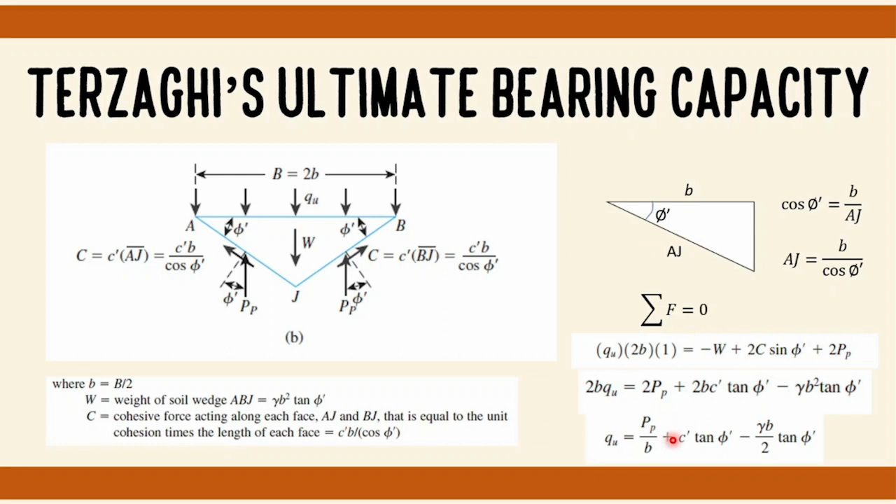Terzaghi stated that the passive pressure is the sum of the contribution of the weight of the soil gamma, cohesion C prime, and surcharge Q, and can be expressed as Pp equals one-half gamma times B tangent phi prime squared times Ky, plus C prime times B tangent phi prime times Kc, plus Q times B tangent phi prime times Kq, where Kc, Ky, and Kq are earth pressure coefficients that are functions of the soil friction angle phi prime.

Substituting the values of Pp into the previous equation, we get the formula: Qu equals C prime Nc plus Q Nq plus one-half gamma B Ny, where Nc equals tangent phi prime times Kc plus 1, Nq equals Kq tangent phi prime, and Ny equals one-half tangent phi prime times Ky tangent phi prime minus 1.

This formula, qu is equal to c prime Nc plus qNq plus 1/2 gamma B Ny, is used for the strip footing equation. This is Terzaghi's equation.

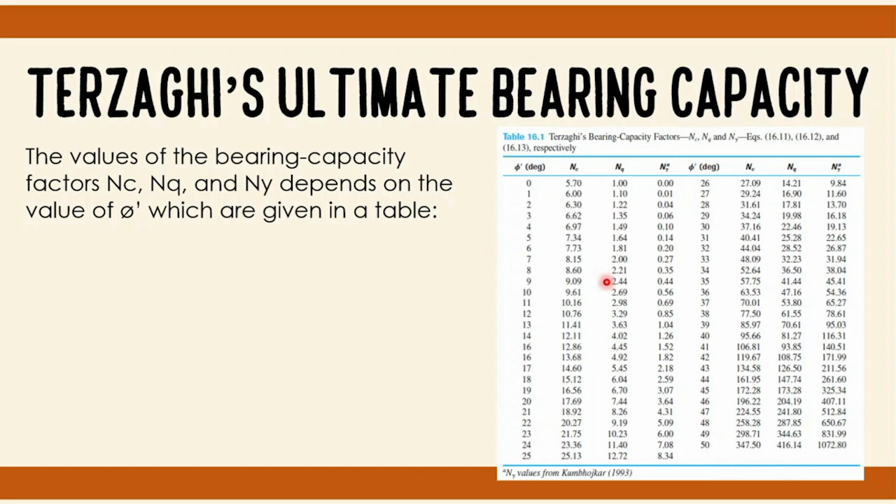For every value of phi prime, there is a corresponding value of Nc, Nq, and Ny. For example, if phi prime is equal to 5, then Nc is 7.34, Nq is 1.64, and Ny is 0.14. However, if this is not given in a table, there are corresponding formulas for Nq, Nc, and Ny.

For Nq, we use the formula by Reissner in 1924: tangent squared of 45 plus phi over 2, times e. This e is not the void ratio, it is exponential on the calculator, e raised to the power of pi tangent phi.

Our Nc is equal to Nq minus 1 times cotangent phi, and our Ny is equal to 2 times Nq plus 1 tangent phi. Nc comes from the formula by Prandtl in 1921, and Ny comes from Vesic in 1973.

Terzaghi suggested equations for square and circular footing. For square footing, Qu is equal to 1.3 C prime Nc plus Q Nq plus 0.4 gamma B Ny. For circular footing, it is almost the same, differing only in the last part, where it becomes 0.3 instead of 0.4.

Terzaghi did not provide an equation for rectangular footing. However, it is given in other books, so I included it here. The rectangular footing formula is Qu equals C prime Nc times 1 plus 0.3 B over L, where L is larger than B, meaning B is the smaller value compared to L, plus Q Nq plus 0.5 gamma B Ny times 1 minus 0.2 B over L.

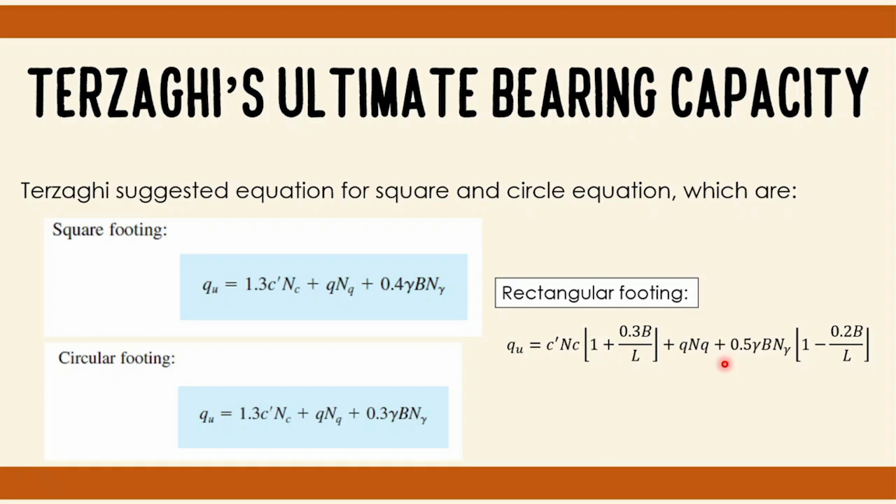Next, let's discuss the difference between the modes of shear failure. We already know how to derive Terzaghi's ultimate bearing capacity equation. Now let's differentiate the modes of shear failure. There are three types of modes of shear failure: general, local, and punching shear.

In local shear failure, as load increases, settlement also increases at almost the same rate. When it reaches the peak load, it settles continuously. However, in punching shear failure, the settlement is almost continuous as load increases.

Good day, everyone. I am King Haroun M. Sultan. In addition to what Mr. Saladaga have discussed, let us talk about what is a foundation. Simply put, a foundation is a part of a structure. It transmits load from the structure itself to a substructure, which in this case is the soil.

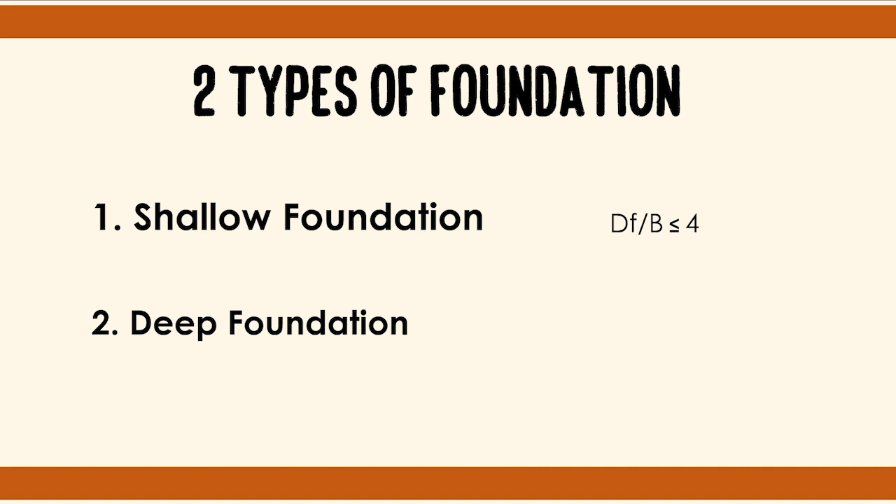There are two types of foundation: shallow foundation and deep foundation. In the shallow foundation, the ratio between the depth of the foundation and the base is less than or equal to 4. In deep foundation, on the other hand, the ratio between the depth of the foundation and the base is greater than 4. So it is a job of an engineer to design a foundation to ensure that the foundation will not undergo shear failure or excessive settlement.

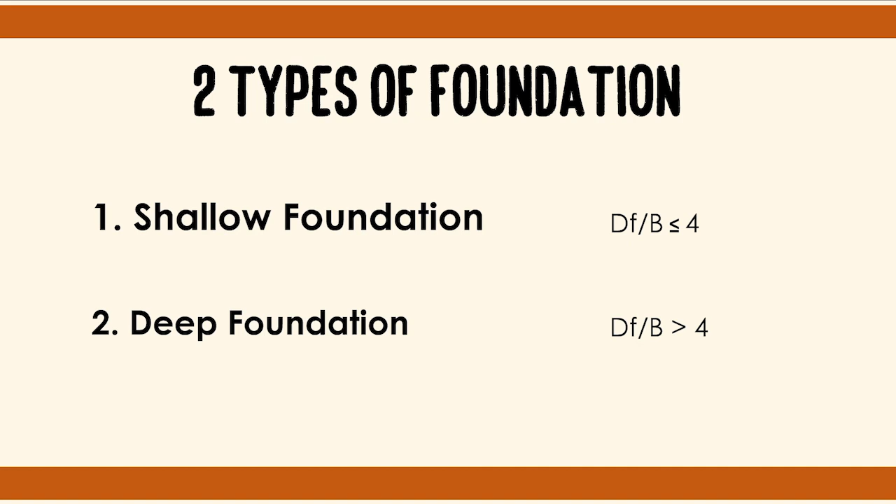Terzaghi's ultimate bearing capacity theory belongs to the shallow foundation. Terzaghi has three equations depending on the shape of the foundation, which was discussed earlier by Mr. Saladaga. So now, let us have an example.

Good day, everyone. I am Katina Petrache. So, my groupmate already discussed the concept of Terzaghi's ultimate bearing capacity theory. So now, I will give an example.

Problem number 1: a square footing for a commercial building has a dimension of 2 meters by 2 meters, founded 1.5 meters below the ground surface. Unit weight of the soil is 18 kilonewton per meter cube with a cohesion of 10 kilopascal. Under the condition of general shear failure: A. Compute the angle of internal friction given the bearing capacity factor NQ is equal to 3.94, and B. Compute the ultimate bearing capacity in kilopascal.

Use Terzaghi equation. Now we have the given: df, or the depth, is equal to 1.5 meters, B of 2 meters, unit weight 18 kilonewton per meter cube, and C, or the cohesion, is equal to 10 kilopascal. So the first question is, we need to find the angle of internal friction with the given bearing capacity factor NQ is equal to 3.94. So in this case, we need to use the Reissner formula.

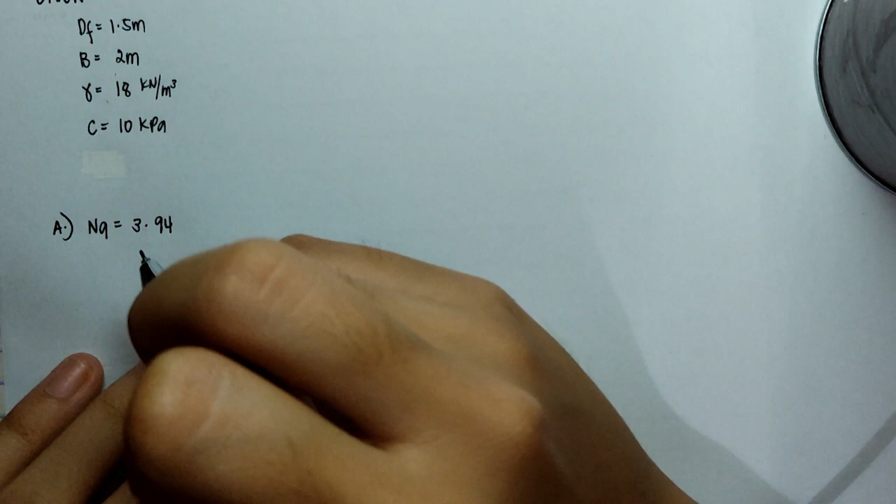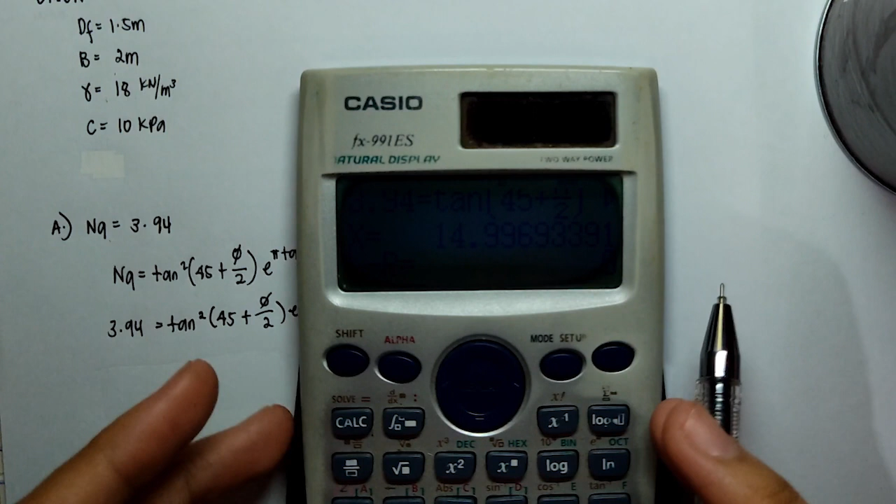We just substitute the NQ, which is 3.94, and then the unknown will be the angle of friction. So this will be the equation in order to find the angle of friction. So in computing 3.94, now we have 14.9966, or 15 degrees. So now we have the angle of internal friction of 15 degrees.

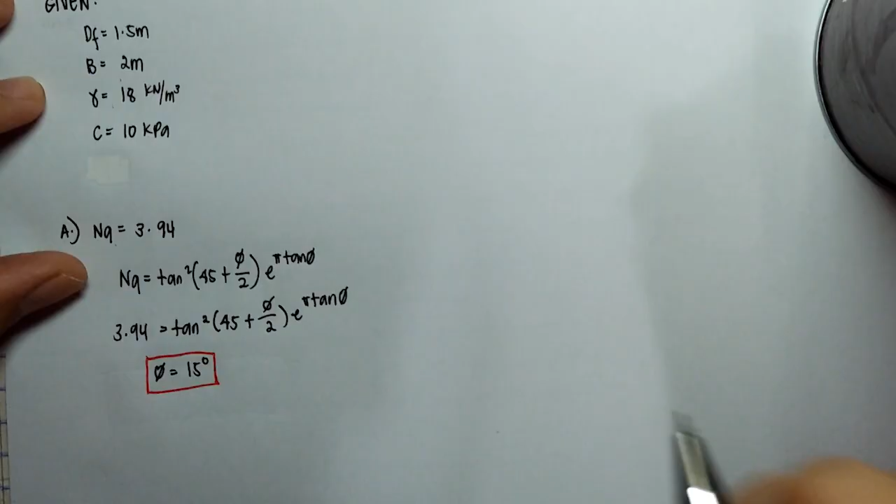Next, we need to find the ultimate bearing capacity in kilopascal. Since this footing is a square footing, we need to use the square footing formula in general shear failure. So we have this formula.

We all know that we have the value for C, which is 10, the NQ, which is 3.94, the unit weight, which is 18, and the B, or the base of the footing, is 2 meters. Now the missing values, in order to get the ultimate bearing capacity, are NC, Q, and NY.

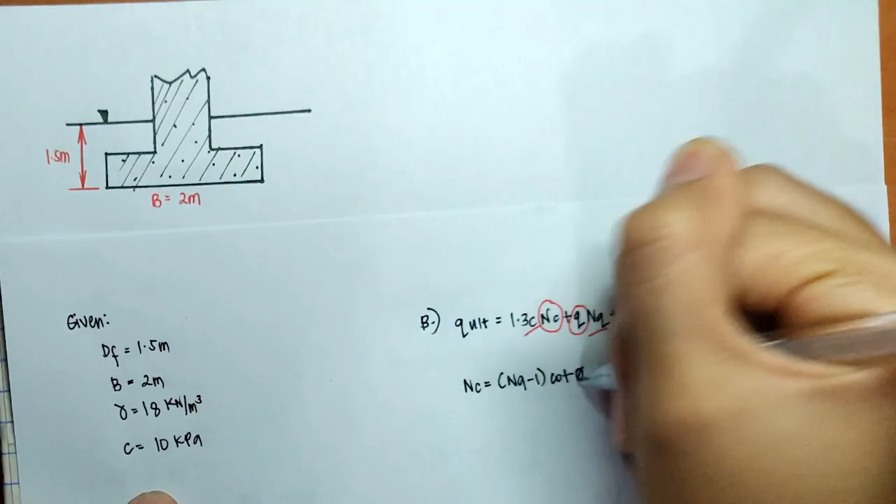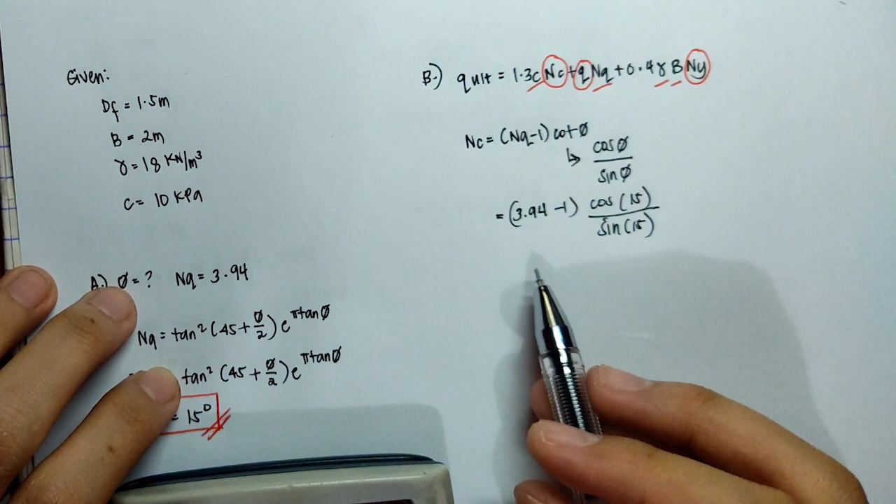So in calculating, we now have NC is equal to 10.972. Now we have the value of NC.

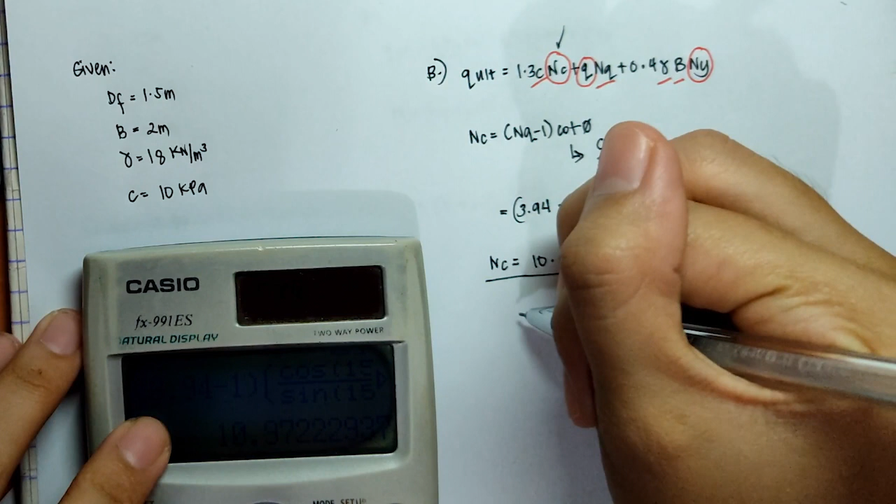Next, we need to get the Q. So we all know from the previous discussion about the concept that Q is equal to gamma, or the unit weight, times the df, or the depth. So we have values for this gamma and df, so we just substitute directly. We have 18 times 1.5. Q is equal to 27.

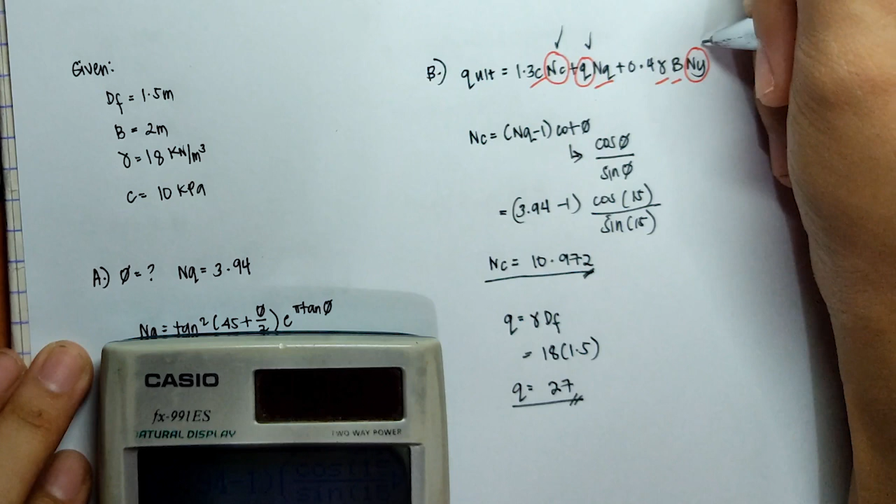Now we have Q. The last one, we need to compute the NY. So for NY, we will use the basic formula, which is this one. So we have the value for NQ and the angle of internal friction, so we substitute.

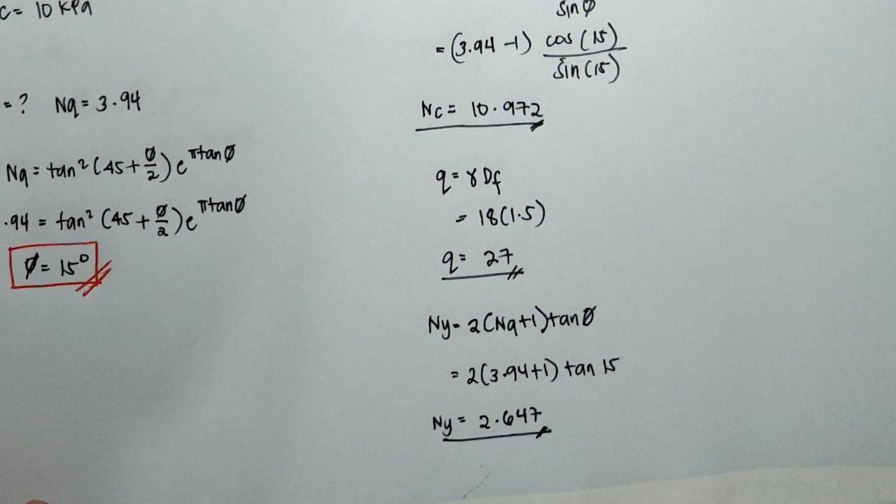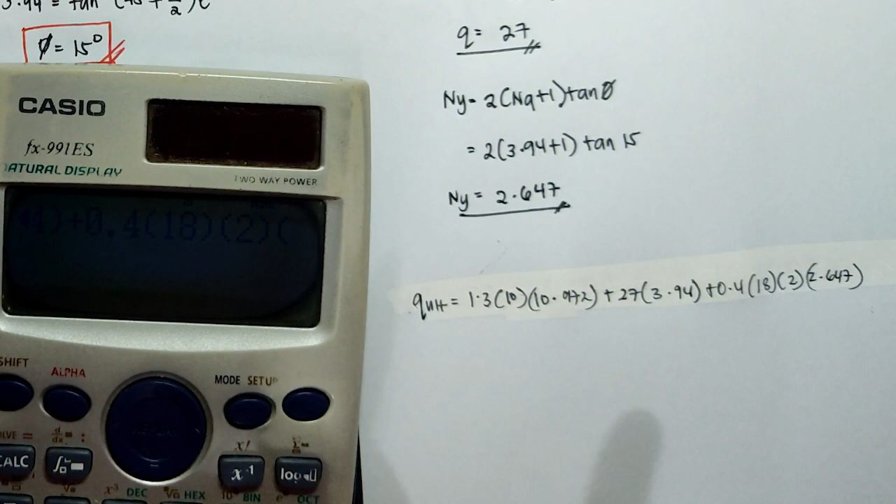Now we have the value for N gamma, which is 2.647. Now we can substitute the ultimate bearing capacity by substituting all the values in this equation. So to calculate, we have the ultimate bearing capacity of 287.133 kilopascal. So this will be the final answer.

Solution for sample problem number 2. First step, what we want to do is draw the figure for the foundation, and take note of the given unit weight of the soil, 18 kilonewton per cubic meter, cohesion C is equal to 30 kPa, and angle of internal friction 30 degrees. So using A, ultimate bearing capacity, using Terzaghi's equation.

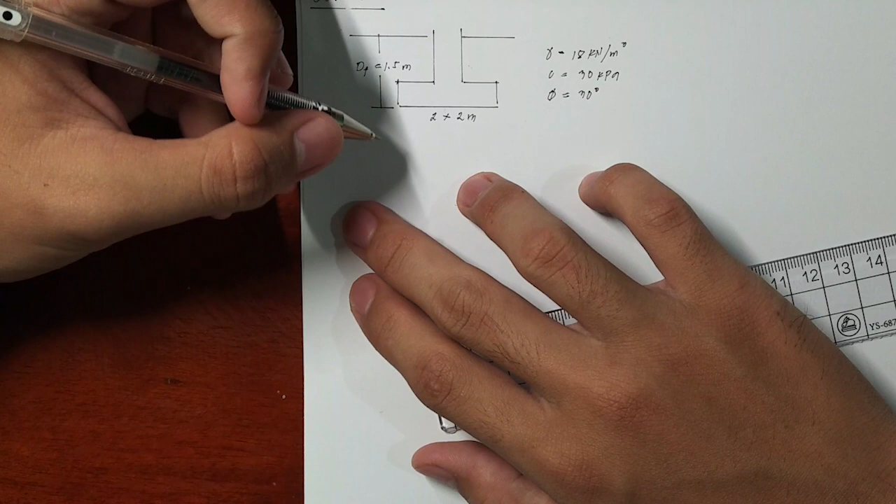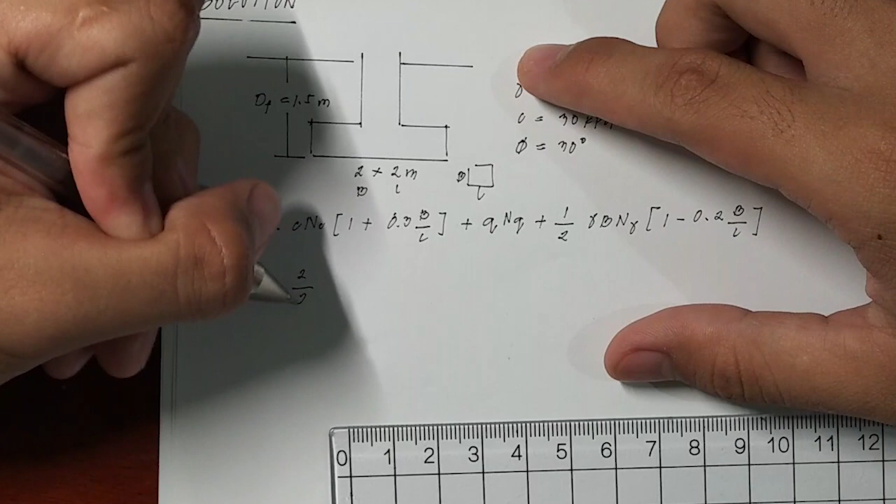Using the formula QU, so B here is the base and L is the length, like this. Since B divided by L is equal to 2 over 2, which is equal to 1, therefore we can simplify the equation.

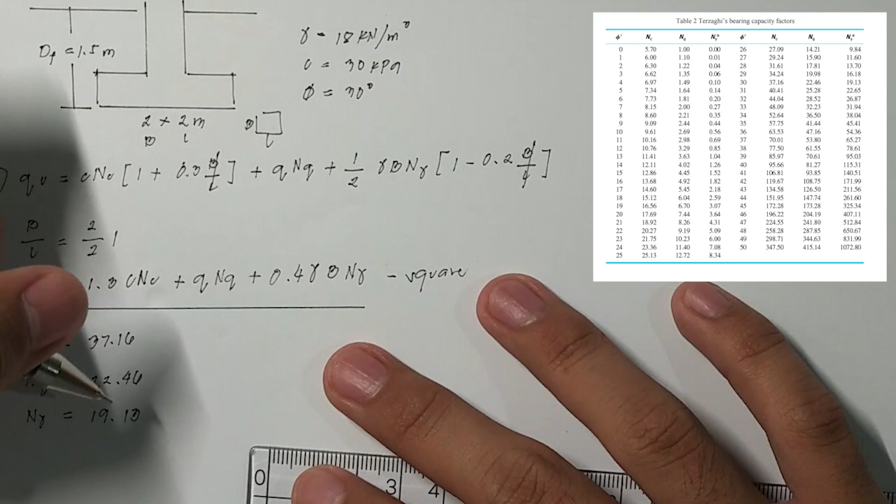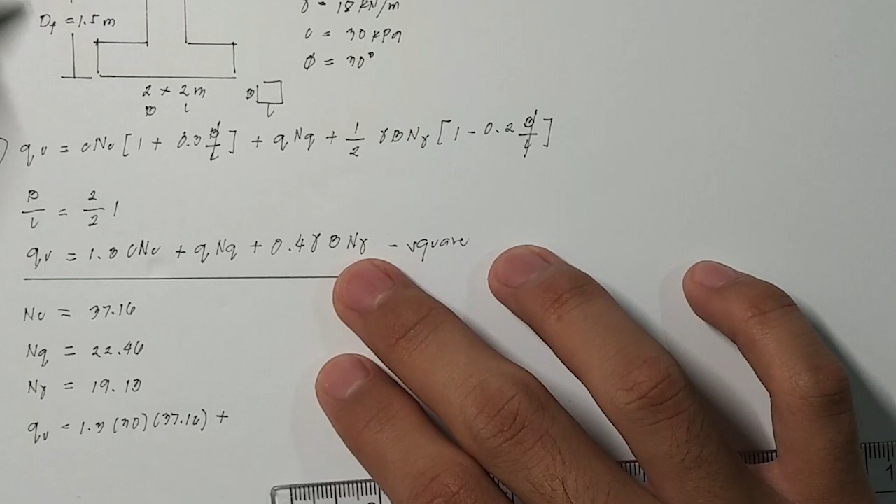Substituting the values: Q is the stress at the base due to the unit weight of the soil at its depth, so 18 times the depth of the foundation which is 1.5, giving 27 times NQ plus 0.4 times 18. So the ultimate bearing capacity is equal to 2331.132 kPa. This answers part A.

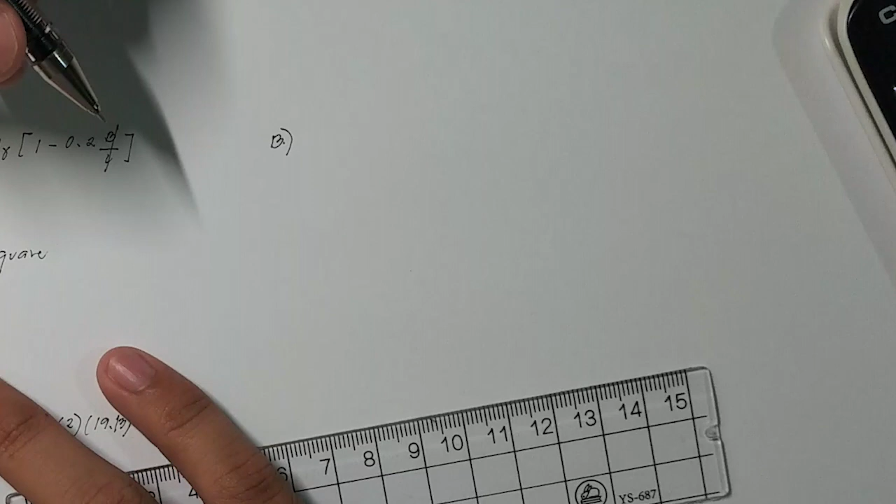For B, allowable bearing capacity. The allowable bearing capacity is just Q ultimate bearing capacity divided by the safety factor. So Q allowed is equal to 2331 divided by the factor of safety, giving Q allowed equal to 932.453 kPa.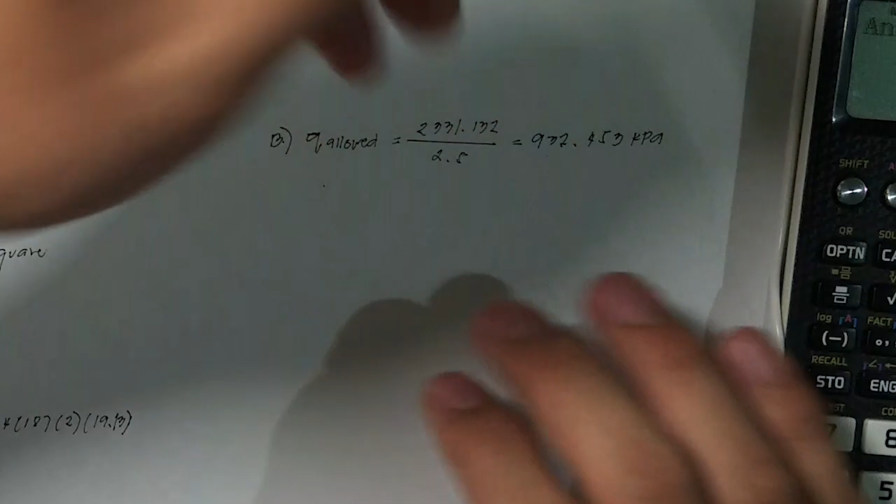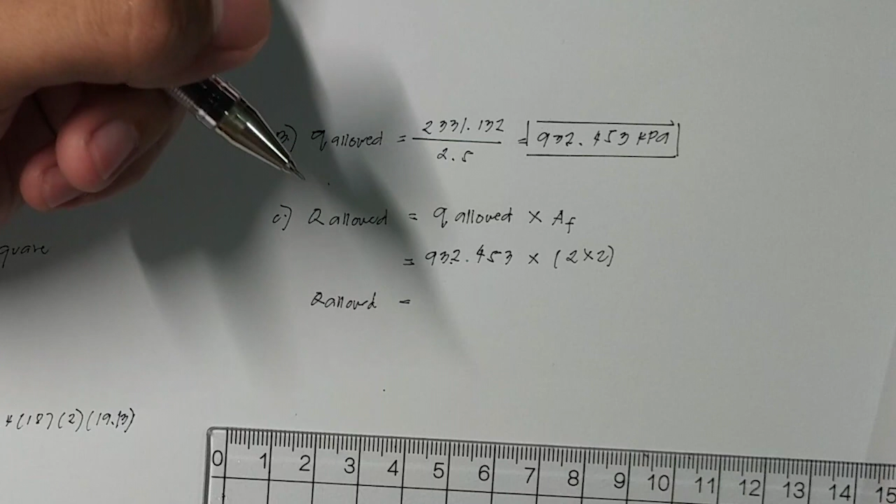The allowable load is simply Q allowed times the area of the foundation, AF. So 932.453 times area 2 times 2. So Q allowed equals 3729.812. Since this involves area, the unit for this is kilonewton instead of kPa.

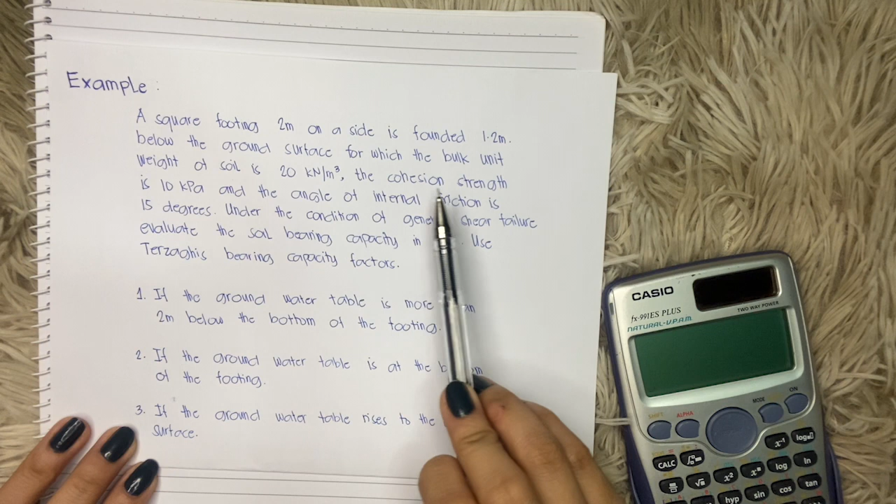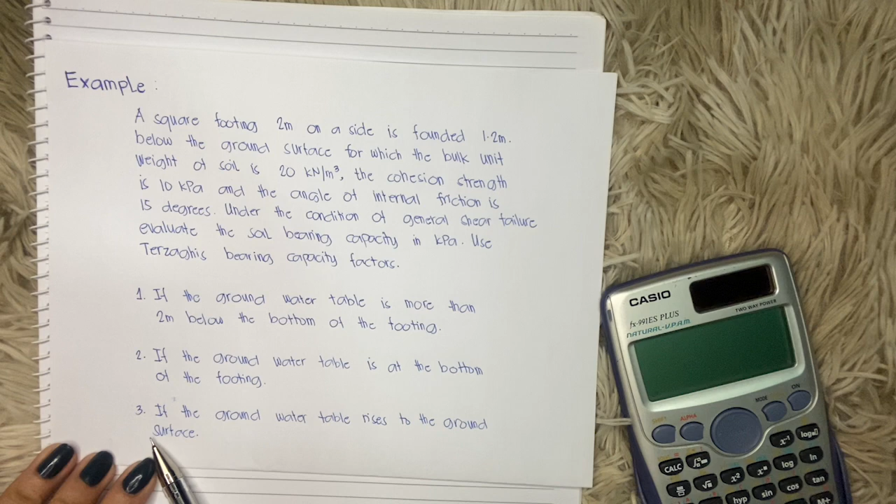Example: a square footing 2 meters on the side is founded 1.2 meters below the ground surface, for which the unit weight of soil is 20 kilonewton per cubic meter. The cohesion strength is 10 kPa and the angle of internal friction is 15 degrees. Under the condition of general shear failure, evaluate the soil bearing capacity in kilopascal, using Terzaghi's bearing capacity factors. Number 1, if the groundwater table is more than 2 meters below the bottom of the footing. Number 2, if the groundwater table is at the bottom of the footing. Number 3, if the groundwater table rises to the ground surface.

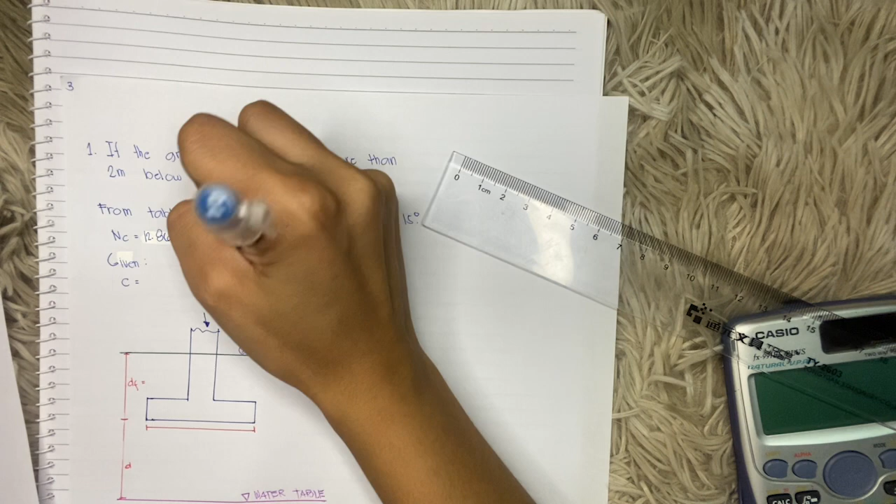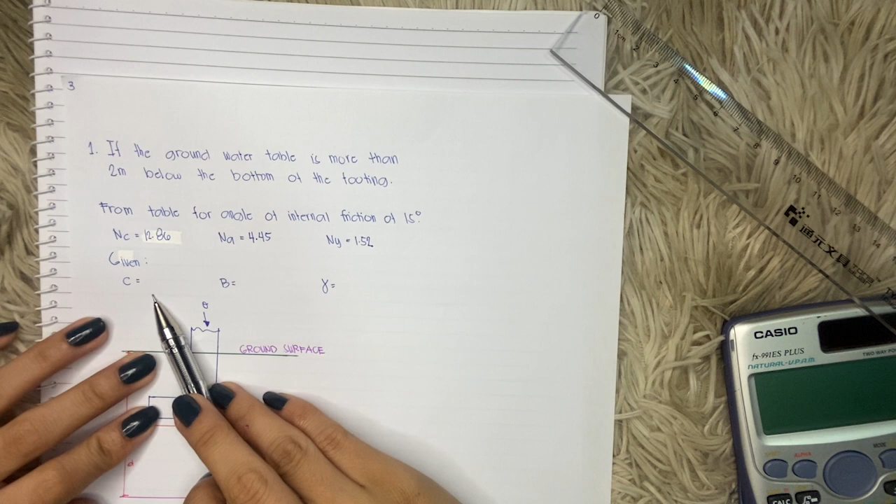Since the bearing capacity factors are complete, let's write the given. The cohesion of the soil is 10 kPa.

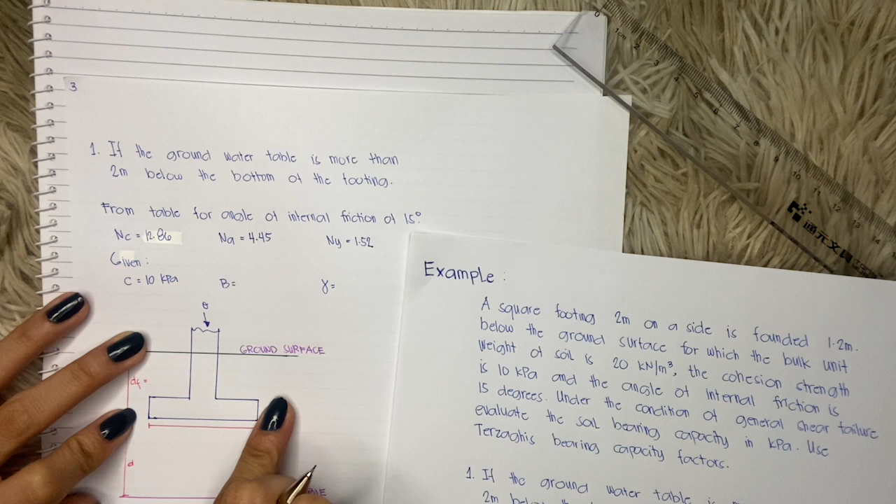The width B of the square footing is 2 meters, and the unit weight of the soil is 20 kilonewton per cubic meter. So that's it, and here's our DF.

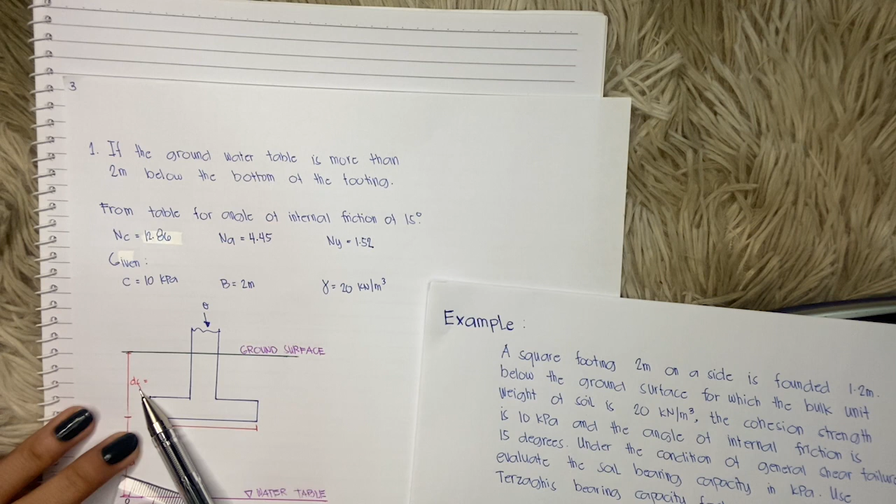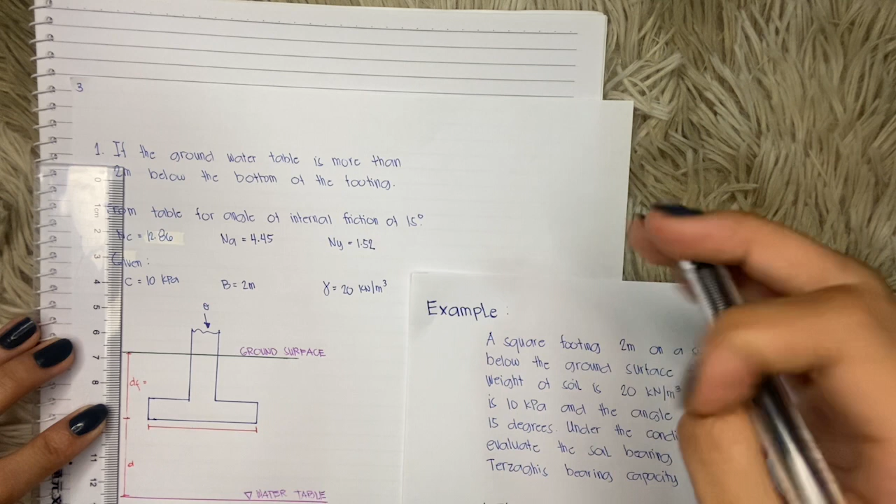DF is the depth of the footing beam, which goes from the ground surface to the bottom of our footing beam. That's our DF, given in the problem as 1.2 meters.

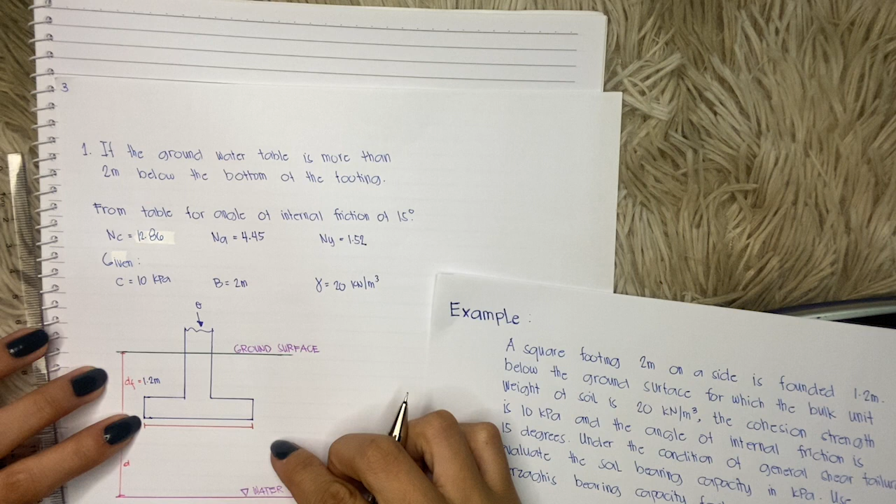So for problem number 1, if the groundwater table is more than 2 meters below the bottom of the footing, meaning from the bottom of the footing to the water table is more than 2 meters, and our width B is equal to 2 meters, let's draw this.

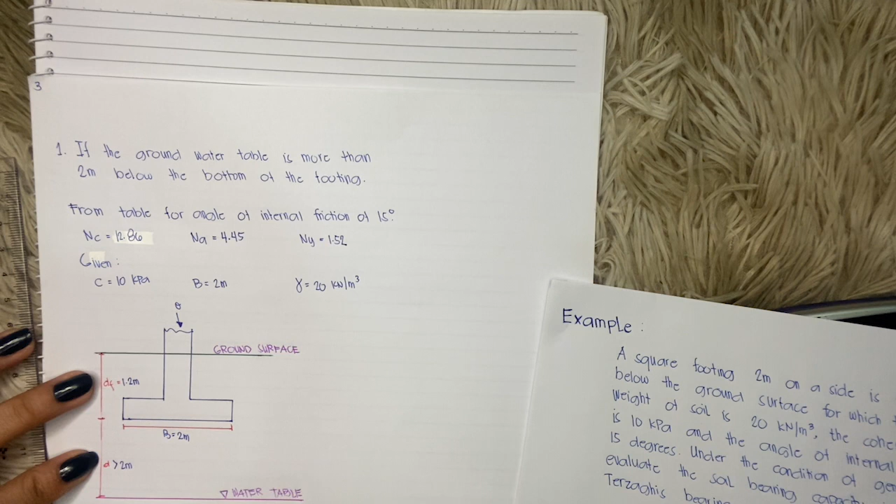Next we'll do the modification of bearing capacity equations due to the presence of the water table, determining whether it's case 1, case 2, case 3, or case 4. In this problem, it is case 3.

Why is it case 3? Because in case 3, the water table is located so that D is greater than B. D is the distance between the water table and the bottom of the footing beam. Since it's more than 2 meters, this falls under case 3, where D is more than B.

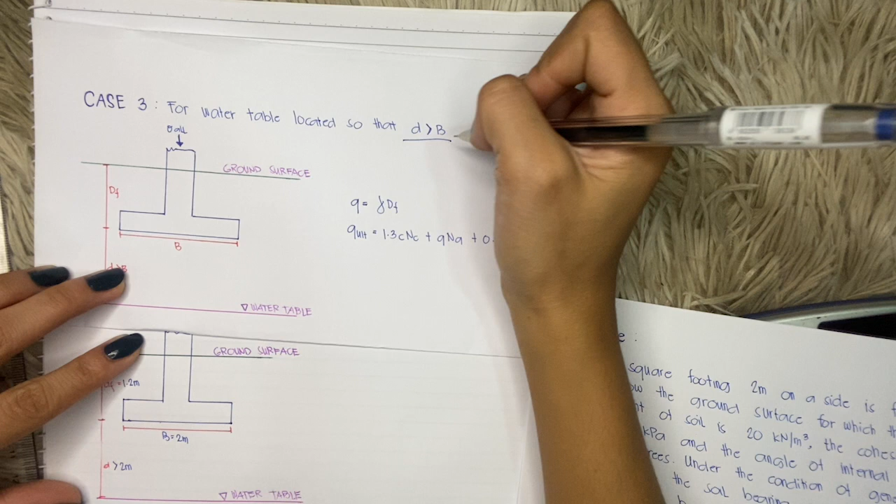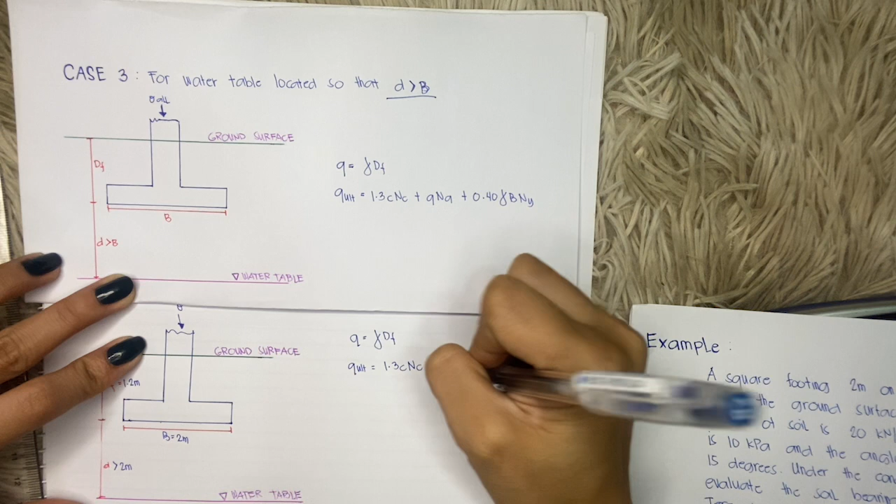So this is the formula we will use. To get Q, the effective surcharge, we use the case 3 formula: unit weight multiplied by the depth of the footing beam. Then the ultimate bearing capacity equals 1.3C times NC, plus Q times NQ, plus 0.40 times unit weight, times width, times NY.

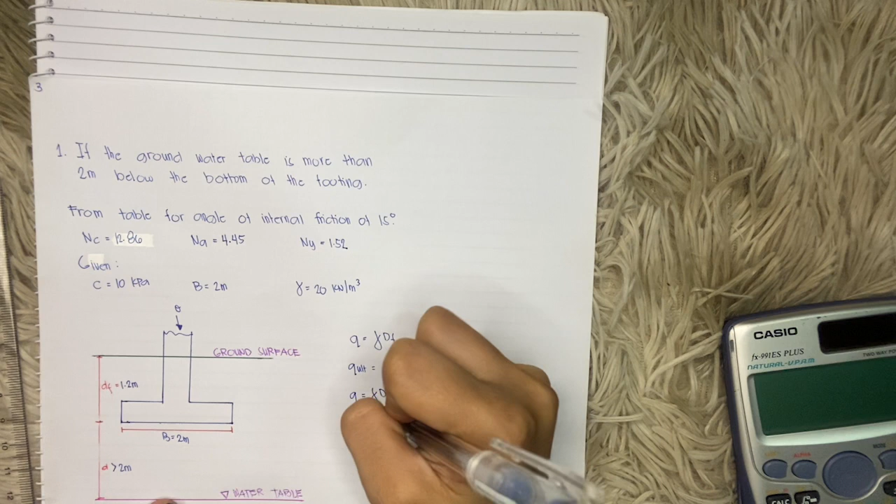Let's solve. First, get the effective surcharge. Q equals unit weight of soil multiplied by the depth of footing beam: Q equals 20 multiplied by DF, which is 1.2 meters. So 20 times 1.2 equals 24. Our Q is equal to 24.

Then we get the ultimate bearing capacity: 1.3 multiplied by the cohesion, 10, times NC, which is 12.86, plus our Q, 24, multiplied by NQ, which is 4.45, plus 0.40 times the unit weight of soil, 20, multiplied by the width, 2 meters, and NY is 1.52.

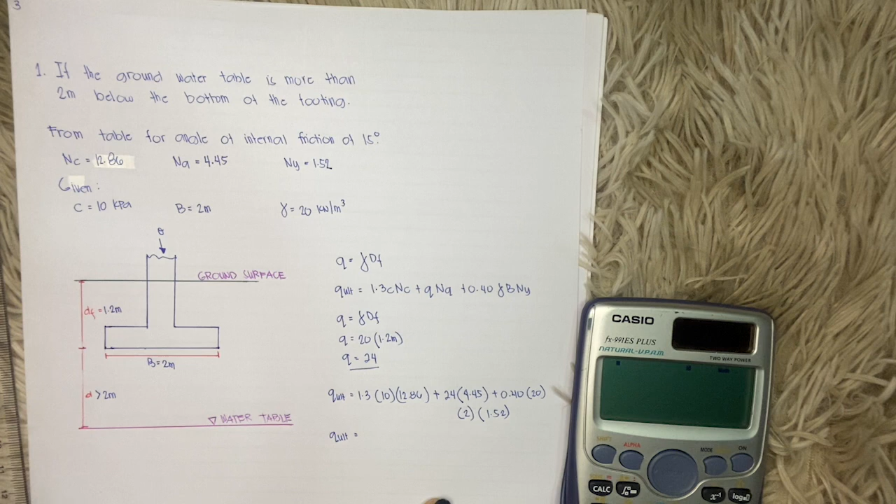So the ultimate bearing capacity equals 1.3 multiplied by 10 times 12.86, plus 24 multiplied by 4.45, plus 0.4 multiplied by 20 multiplied by 2 multiplied by 1.52, which equals 298.3 kPa. That's our answer for case 3.

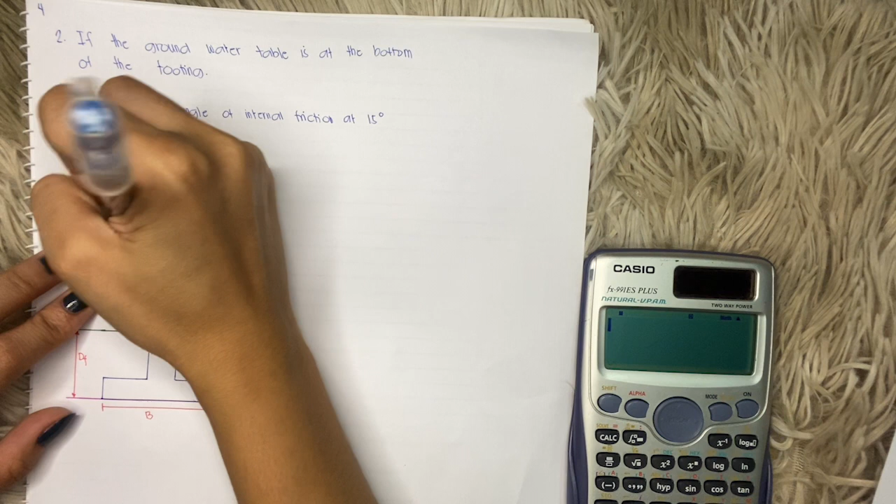Next is number 2: if the groundwater table is at the bottom of the footing. We already have the values: NC is 12.86, NQ is 4.45, NY is equal to 1.52, cohesion is 10 kPa, B is 2 meters, and unit weight of soil is 20 kilonewton per cubic meter.

Let's determine what case this is. If the groundwater table is at the bottom of the footing, then the water table and the bottom of the footing are at the same distance, so the groundwater is at the bottom of the footing. Here's the water table, and there's the bottom of the footing.

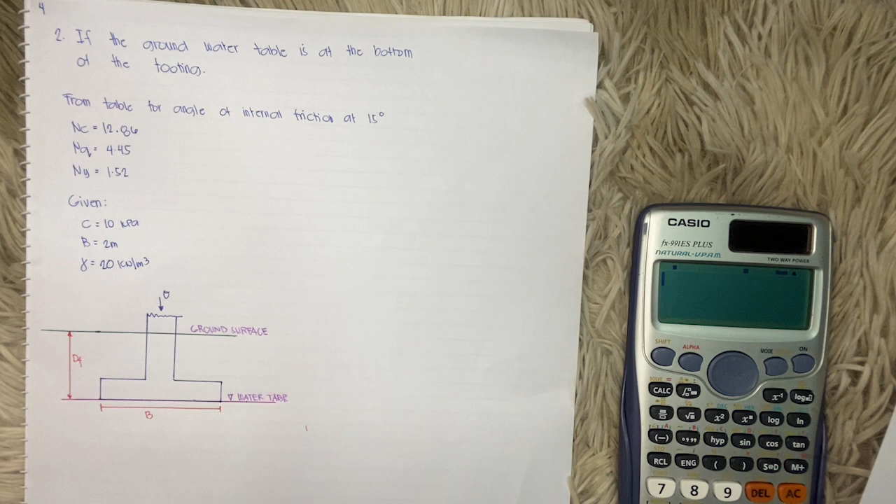So what case is this? This is case 4. Why is it case 4? Because in case 4, the water table is located at the bottom of the foundation, at the bottom of the footing. So this is our number 2, which is case 4.

So, paano natin isosolve yung case 4? So, to get the Q is equal to unit weight multiplied by DF, then the ultimate bearing capacity is equal to 1.3 CNC. Same lang dun sa formula. Q NQ plus 0.4 unit weight, the width multiplied by the NY. Where, ito, yung natin dito, unit weight is equal to Y sat minus the unit weight of water.

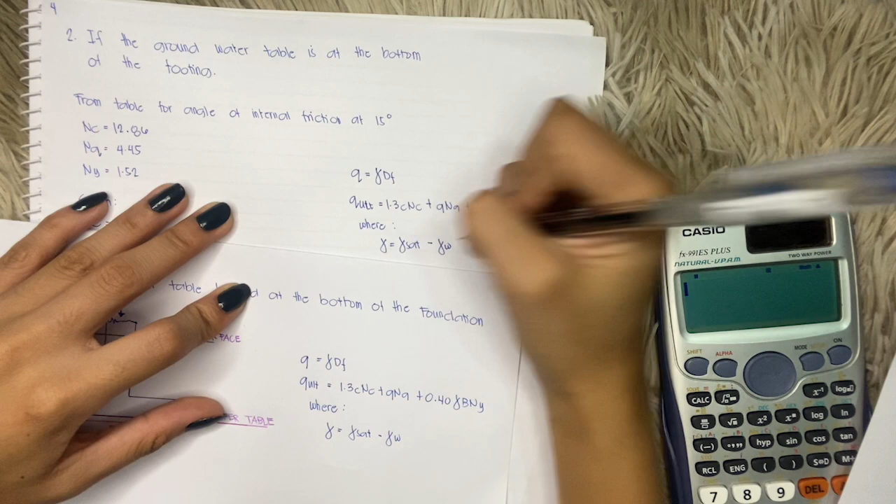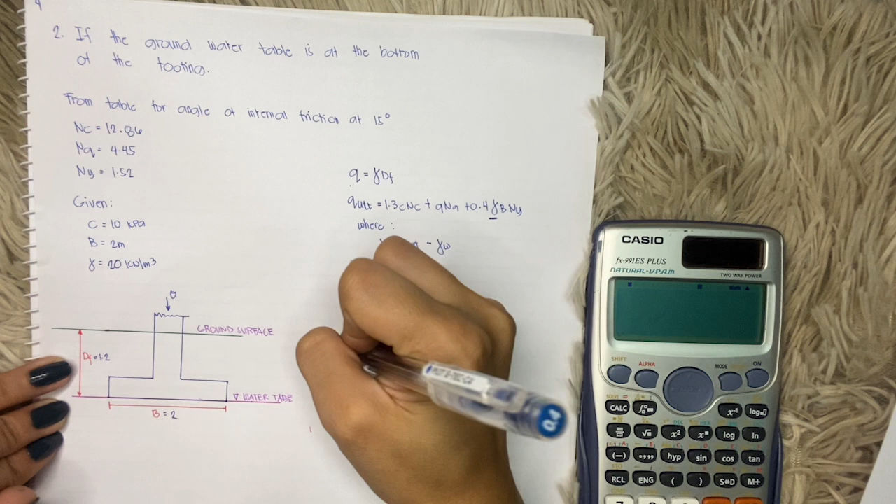So, first muna natin is, kukunin natin yung Q. So, Q is equal to unit weight of soil, 20, same pa rin, multiplied by 1.2, the DF. Diba, DF natin dito is 1.2, then the B natin is 2. So, Q is equal to, ilan nga yun? 20 times 1.2, 24. Then, kunin na natin muna yung unit weight natin, which is Y sat minus unit weight of water, which is, Y sat natin is 20 minus unit weight of water, 9.81. So, yung gagamitin na natin na unit weight is 20 minus 9.81 is equals to 10.19 kilonewton per cubic meter.

So, kukunin na natin, makukuha na natin yung ultimate bearing capacity, which is 1.3 multiplied by the cohesion, which is 10, the NC, which is 12.86, plus the Q, which is 24, multiplied by the NQ, which is 4.45, plus the 0.4 multiplied by the unit weight. Ito na yung gagamitin natin. 10.19 multiplied by the width 2 multiplied by the NY, which is 1.52. So, Q ultimate bearing capacity natin is 1.3 times 10 times 12.86 plus 24, 4.45 plus 0.4 multiplied by 10.19 multiplied by 2 times 1.52. So, 286.371 kPa. So, ito na yung sagot.

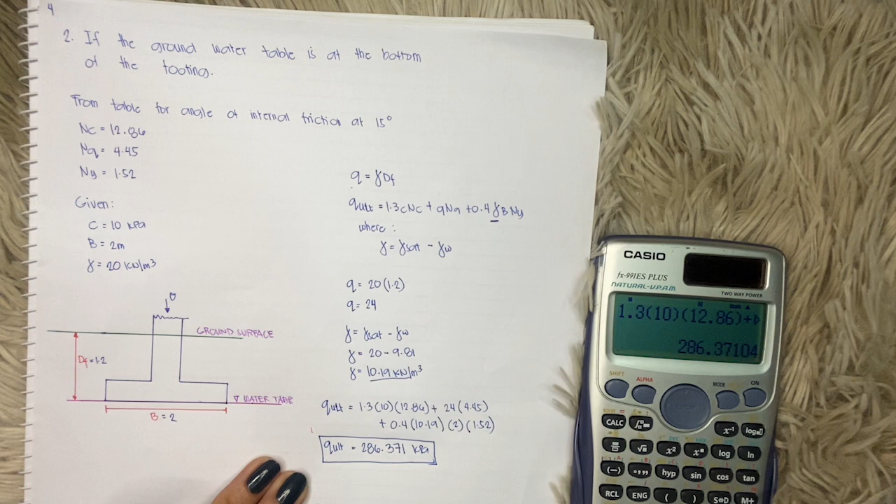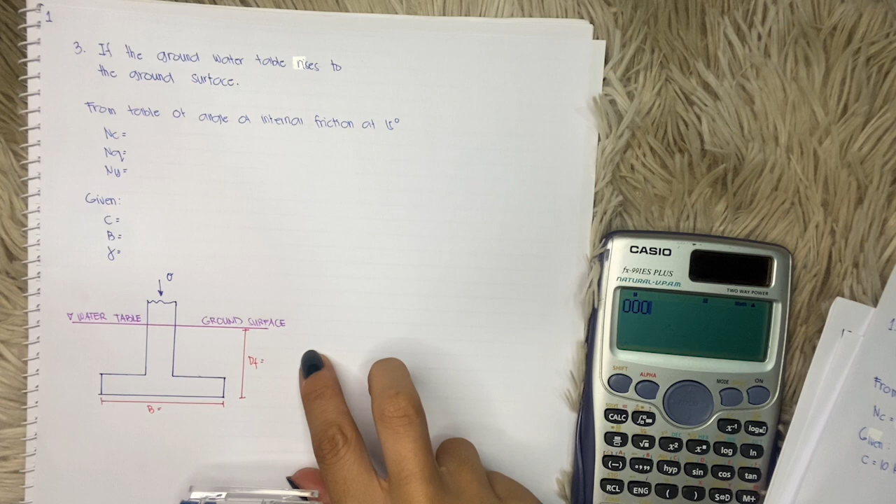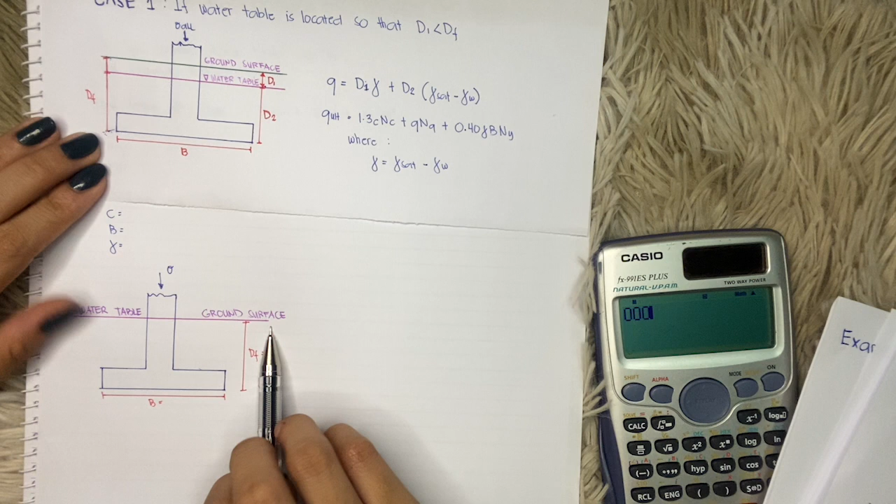So, number 3. Ito yung number 3. If the groundwater table rises to the ground surface. So, yung groundwater table natin tsaka yung ground surface natin is magka-level sila. So, anong case to? Case 1 to siya. Bakit siya case 1? Kasi, di ba yung case 1 natin is dapat yung D1, which is yung D1 natin is distance ng ground surface papuntang water table is less than the DF natin. Yung distance mula sa ground surface papunta sa bottom ng footing natin. So, dito, magka-level man yung water table natin tsaka ground surface, therefore, yung D1 natin dito is equal to 0. Diba? Then, DF natin 1.2 pa rin.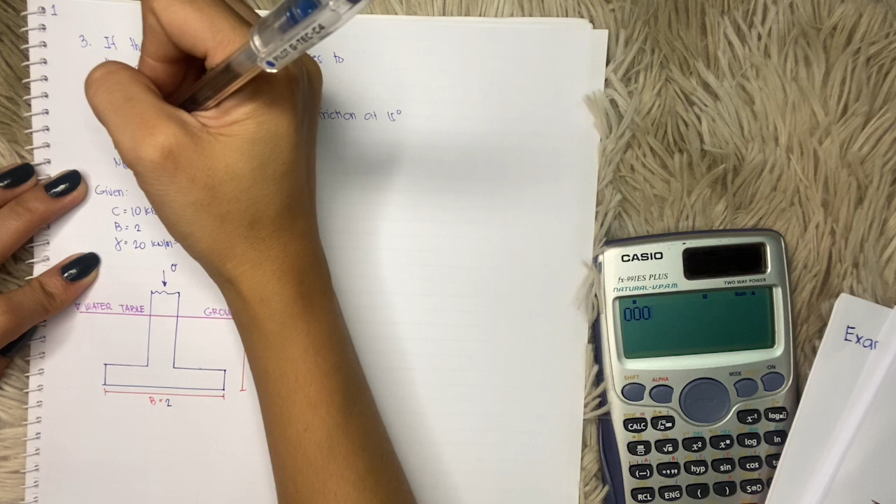B is 2, tsaka yung C natin 10, tsaka 20 kilonewton per cubic meter yung unit weight natin, KPA. Tsaka yung NC natin, yun pa rin yung gagamitin natin kasi 15 degrees, 12.86, 4.45, tsaka yung NY natin is 1.52. So, yung formula na gagamitin natin para makuha yung Q natin, which is the effective surcharge, is Q is equal to D1 unit weight plus D2 Y sat minus unit weight of water.

Then ultimate bearing capacity is equal to 1.3 CNC, yun pa rin siya, Q and Q plus 0.40 unit weight multiplied by the width, then multiplied by NY, which is, yung ito na naman natin, yung unit weight natin is Y sat minus unit weight of water. Or the saturated unit weight minus the unit weight of water.

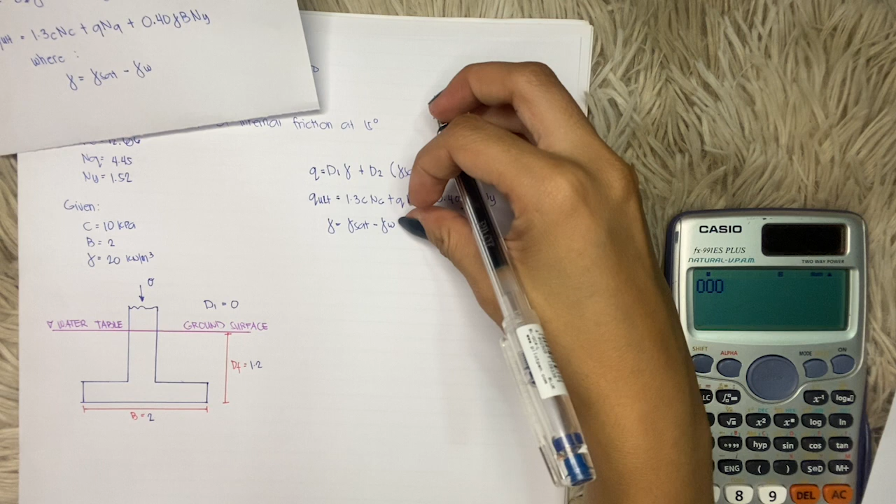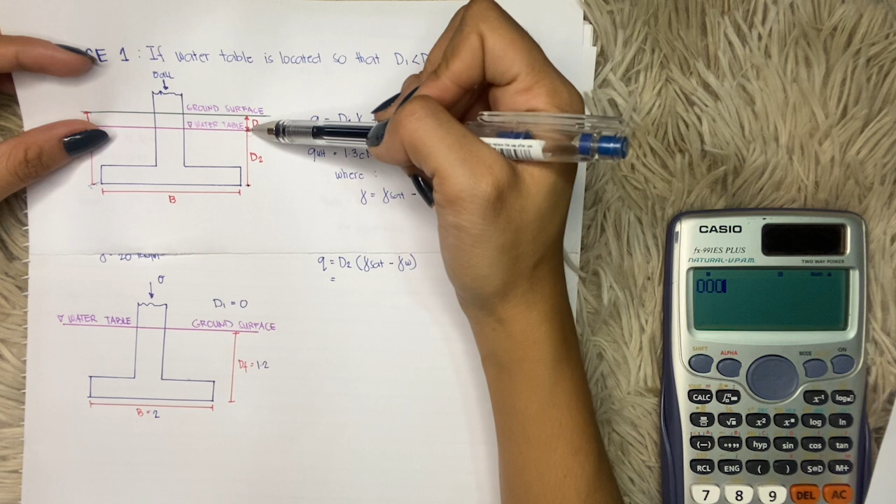So, yung Q natin, first natin kukunin yung Q. So, D1, di ba 0 na to? So, 0 na to siya. So, dito na tayo, D2 multiplied by Y sat minus unit weight of water. So, yung dito pala natin is yung distance mula sa water table papuntang bottom ng footing beam, ng bottom ng footing natin. From distance ng water table papuntang bottom ng footing beam natin, yun yung D2. So, yung D2 natin dito is from water table papunta sa bottom ng footing natin. So, therefore, yung D2 natin is equal to

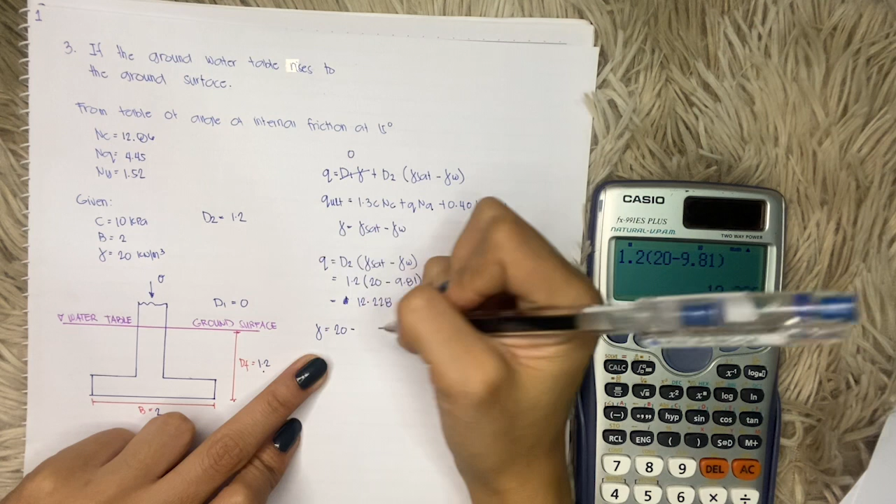1.2. So, 1.2 multiplied by saturated unit weight natin, which is 20 minus unit weight of water is 9.81. So, 1.2 multiplied by 20 minus 9.81, 12.228 yung effective surcharge natin. Then, kukunin muna natin yung unit weight na gagamitin natin. So, unit weight is, yun pa rin, Y sat, which is 20 minus 9.81. So, yung gagamitin natin is 20 minus 9.81, 10.19 kilonewton per cubic meter.

Then, kukunin na natin yung ultimate bearing capacity, which is 1.3 multiplied by 10 multiplied by NC, which is 12.86 plus Q natin, which is, ilan nga yung Q natin? Ito, 12.228 multiplied by the NQ, which is 4.45 plus 0.40. Unit weight na gagamitin natin is ito, 10.19 multiplied by the width natin, 2 times the NY, which is 1.52.

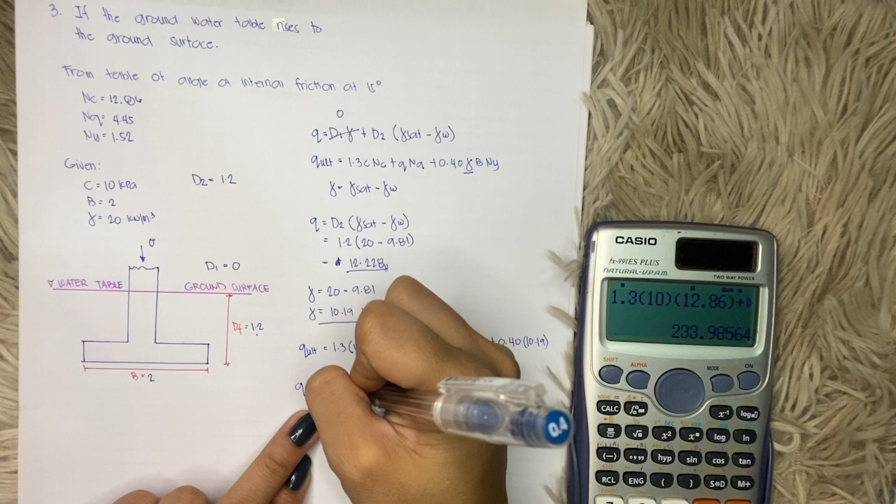So, ultimate bearing capacity natin is 1.3 multiplied by 10 times 12.86 plus 12.228 multiplied by 4.45 plus 0.40 multiplied by 10.19 multiplied by 2 multiplied by 1.52. So, therefore, yung sagot natin is 233.986 kPa. So, ito na yung sagot natin. Thank you!